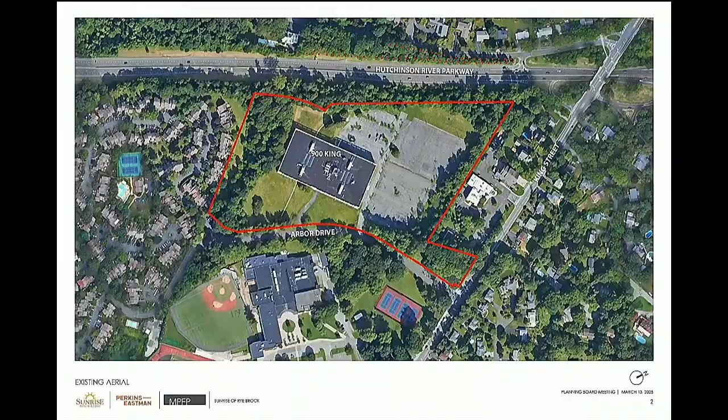So this is the site plan as was approved in September of 2021, and this is our proposed site plan. As you can see, substantially the same and consistent with the prior approvals in terms of coverage and setbacks and the like. It's very hard to differentiate the changes, I guess, so we have layers - we superimposed one outline on the other so you'll be able to see it.

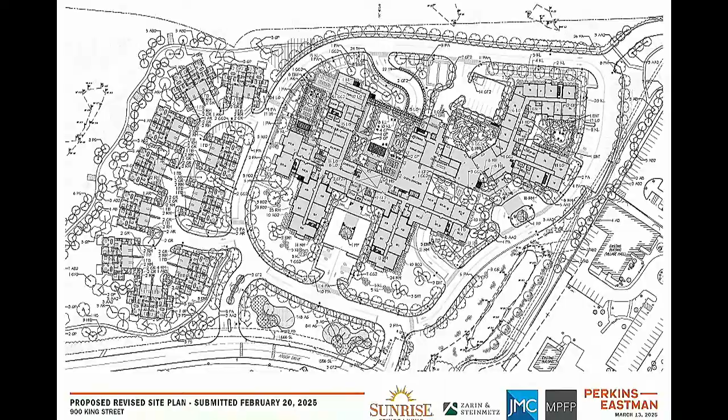But just as a refresh, the number of units, both within the independent living, the assisted living, and memory care, have not changed. And the parking, there's a slight increase in parking because of the two-car garages, but otherwise the parking is consistent with what it was.

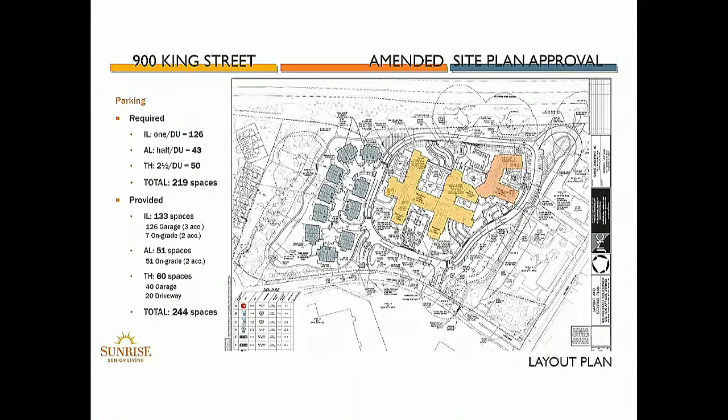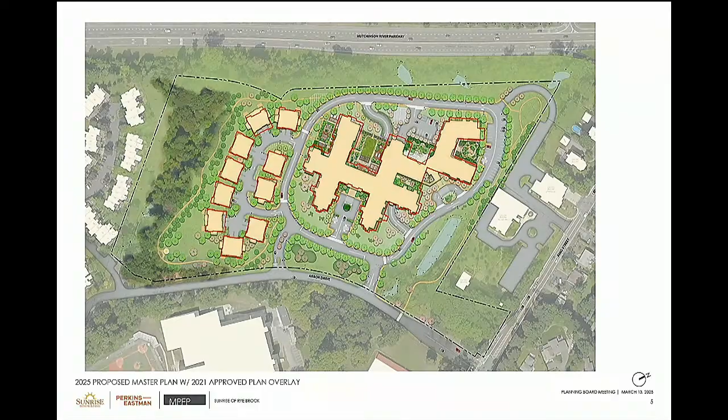I'm going to quickly walk through this, and then I think Rick's going to take over from a landscaping and site development standpoint. This is the master plan landscaping plan rendered to show you - this is the September 2021 plan as approved, and this is the new current plan. Hopefully you can see the red line, which is the outline of the previously approved, superimposed on the new plan.

So this is Rick Parisi, MPFP Landscape Architects. Nice to see you guys, been a long time.

So what Stuart mentioned is what you see here in this plan. The red line is the old building over the new building. What we gain, when David talked about the increase in our open space, that's in those courtyards there. We took a piece of building out and created a couple of new courtyards. The rest of the site plan remains the same. We moved trees around to accommodate some changes in the building.

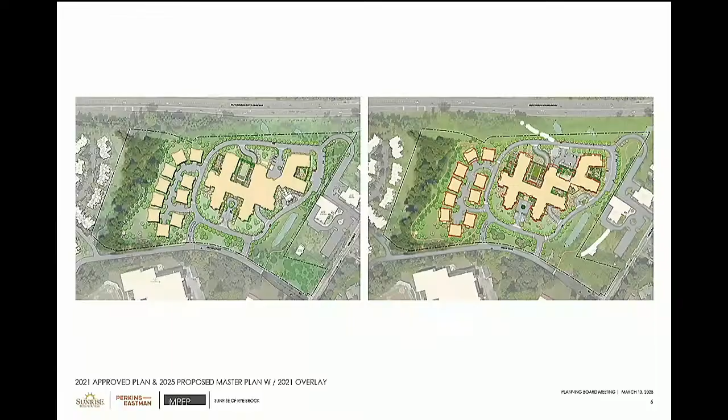There's a memo that notes we were shy on shrubs by 100. We were not intending to be. We're going to have the same amount of shrubs we had before. We didn't really total them up, but you guys did. Our intention is that the planting remains the same, the screening remains the same, the open space increases. They said there was an increase in trees but a decrease in shrubbery. Yes, but there's no decrease in shrubbery intended. In fact, we'll probably have a little bit more. This is an enormous site, and the numbers are very big, but perhaps when we were drafting there was a drafting error, because the number was supposed to be the same. We did put more trees in. I'm sure Sarah caught it and will make sure everyone is in accord on the number of shrubs and trees.

The important thing is that there's a 13,713 square foot increase in the open space. We went to the ARB with that and have an increase in that - that's those courtyards and some of the other areas around there. Everything else remains the same.

What you can see here are the aerials we created in 2019-20. They show the existing vegetation that is retained. We're not taking any vegetation down adjacent to the arbors. That light green area is additional vegetational buffer, which we worked on together with you and the arborists many times, going round and round and adding like 30 feet of additional vegetation along that whole area.

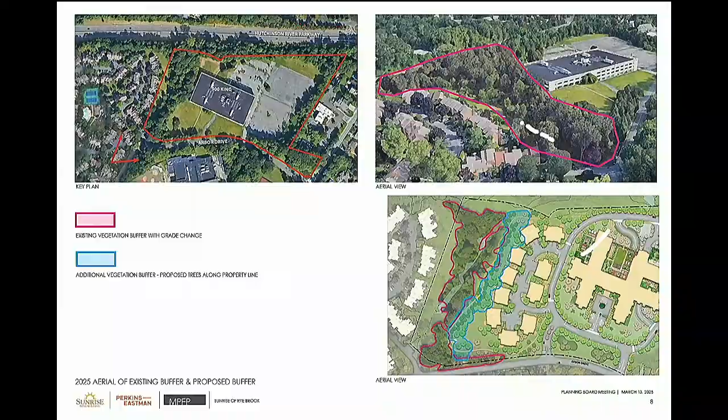Can I interrupt on that? We had another community with a similar initial worry about screening. Screening was added and brought up close to the buildings, and now 10 years later they're getting a lot of dieback, and both parties are sort of regretting what happened, because of the density. I'll let an arborist describe it, but we just went through this with another community here in Rye Brook about two months ago, and both parties are regretting densifying the screening.

You can't plant it like we used to plant parking lots with evergreens. This is planted in a very natural setting - there's a lot of room between the evergreens, and then there's a layer of deciduous trees behind that. We went through this, we gave it a lot of room because we wanted it to be sustainable, so that issue won't crop up. The problem is trees tend to grow, but that's a good thing.

So the next one - that remains the same, it's exactly the same as it was. That's what these two plans show. No change in the buffer.

Next, these are the pictures - I forget who walked this with me, but Steve Ketchumont walked this with me at the Arbors. We walked this many times and took the photographs because everybody wanted to see the winter views. On the left is the winter view, and on the right is the proposed condition with the new building. Remember, we're putting over 30, 40 feet worth of layers of trees beyond that, and some of those are evergreen. We showed you this in 2021 - so again, another view.

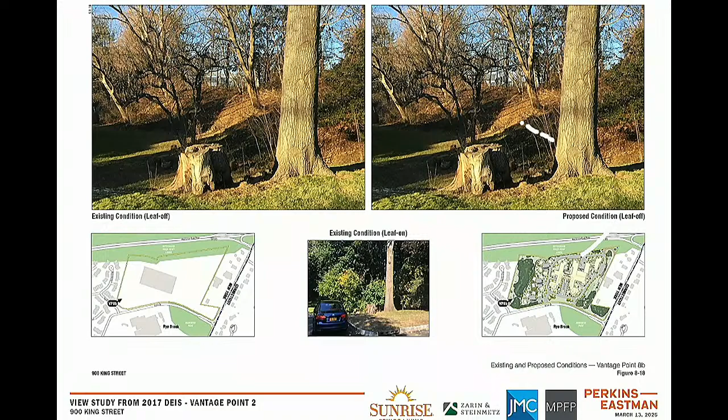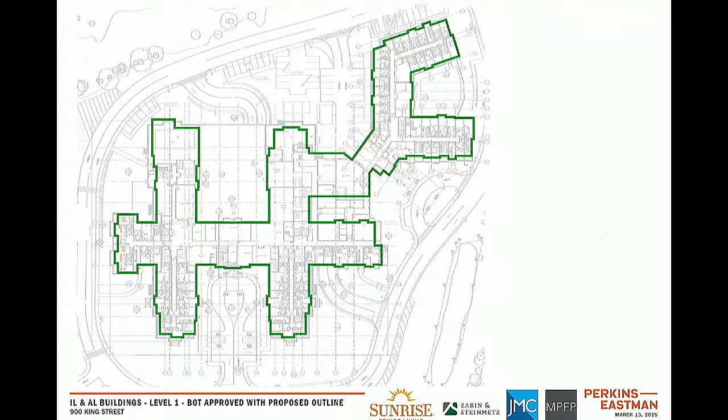And this is the new proposed plan. Just to give you numbers to work with, a little over 48,000 square feet in total building area have been reduced from the IL and AL buildings, and the footprint itself is reduced by over 10,000 square feet between the two buildings.

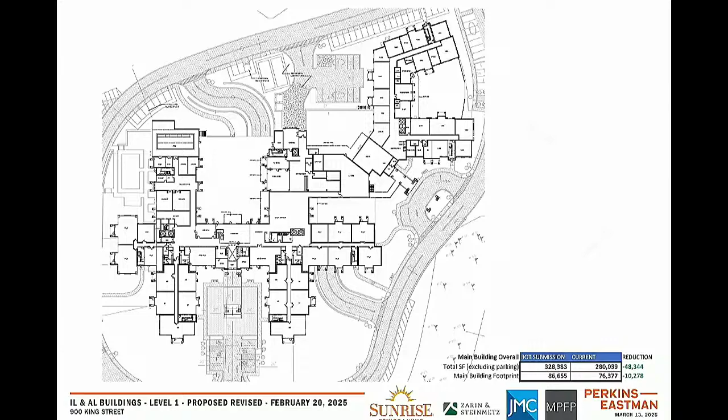I'm not going to go through these in detail, but we've got some slides that will highlight it. These are the sort of changes around both the site and the building that really articulate the difference that we've done. I think Anthony's going to walk through these one by one.

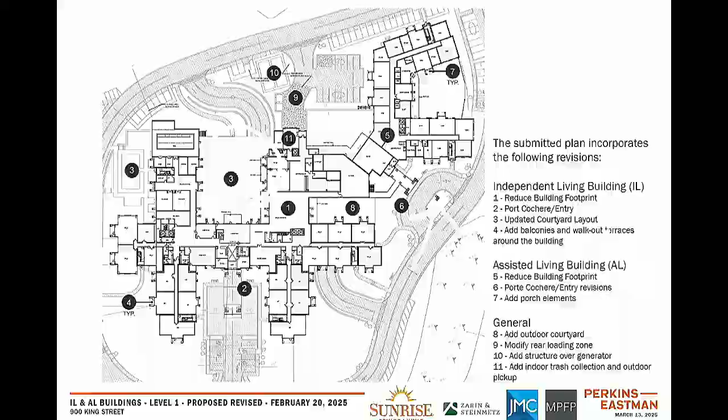So as you come in up through into that space, we increased the access width around there to 24 feet to give us some more room, just in case you want a little bit more flexibility and some more space as cars are parked along the curb. And just keeping in theme with the revised architecture, squaring those things off just seemed to open everything up and make it a little bit more open feel instead of having more of a cramped feel.

The remainder of the on-grade parking spaces: the previous plan proposed 7 parking spaces located in this area. We're still locating 7 on-grade parking spaces in that area. The location of where this access came off the main ring road has not changed. It was really just the circulation around the drop-off area which was changed.

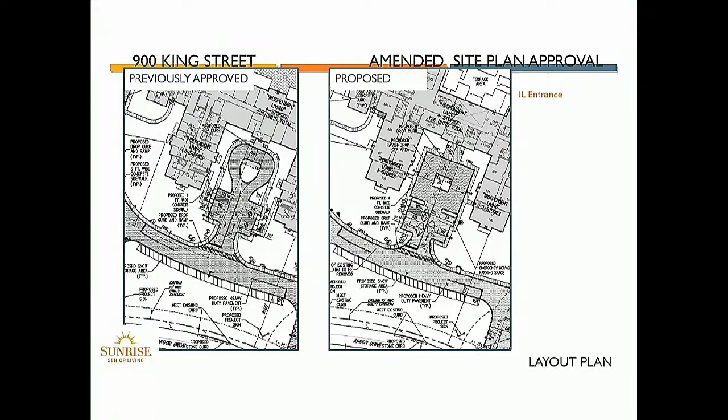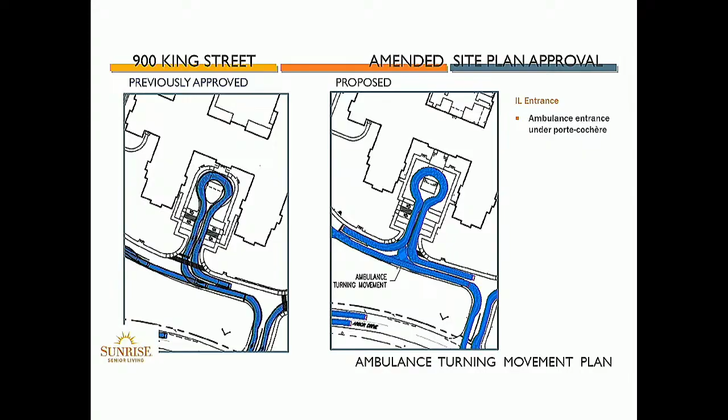Let's go to the next. What I do want to mention here too is the porte-cochere. There's the existing porte-cochere and the new porte-cochere here. It still maintains a clearance height of 14 feet, which is important for ambulance access around. So as you can see here, we provided the turning movement plan for an ambulance to make sure that they can adequately maneuver around the drop-off area and under the porte-cochere.

This is the AL entryway. Previously, on the left, this is the previous approved plan. It's still what they used to call the eyebrow drop-off area with the arch. The location of the actual turnaround has not changed from plan to plan, but the width increased 6 feet, from 18 to 24 feet, just to provide a bit more space for the drop-off.

Have emergency services seen the new proposal? We met with what's called the Safe Housing Task Force, or Emergency Services Task Force, and had a meeting. They had some comments, but didn't seem to have issues with these changes to the entryways. We reviewed everything and provided it to them, so we're waiting for their comments, which we'll address, and will probably have another meeting with them to cover all their concerns.

And I assume that includes fire, police, and EMTs? Yep. One of the comments from EMS about this entryway was to have an area for the ambulance to park, hence why you now see 24 feet there. That makes sense, so you're able to have an ambulance stationed while cars go by.

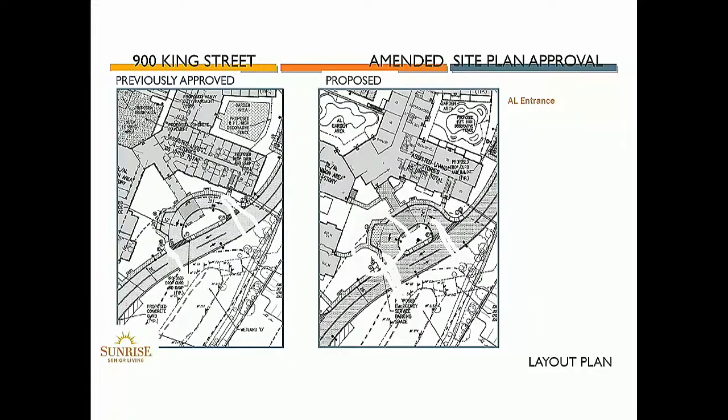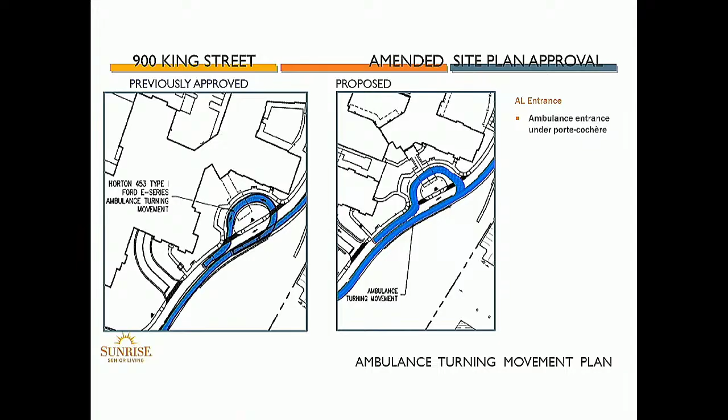In addition, there's an emergency service vehicle parking area, which was requested at the previous approval, and those still remain at each entrance, located there. With the porte-cochere, the height clearance is 14 feet. This shows the movements of an ambulance, able to maneuver around there without any conflicts.

The next area with minor modifications was the back of the house, or back of the building. This change was brought more to provide more open space, as Mr. Parisi mentioned before, and program space for the facility.

On the previously approved plan, this area here versus this area on the current proposed plan — you can see there's now a large AL garden area, which is a program space for some of the residents of the assisted living portions of the building. To accommodate that change...

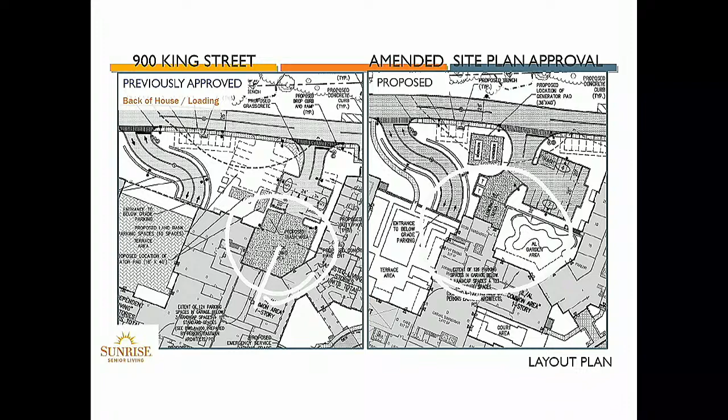Going to the next slide — the loading area, the hard concrete loading area, which was oversized to begin with for what was being done there, you can see it a little better here. It was modified to just provide an apron for when trucks come in and drop off. Everything is loaded off the truck, so there's no recessed loading areas or anything like that.

It was revised slightly to accommodate this new gardening area, and also to provide a bit more open space and green. We also wanted to move the generators, which were located closer to the building, as you can see on the left in green — they were relocated further west, towards the hutch, for noise and to keep them further from the building. Same with the trash, which was relocated up into the corner of a parking area over here.

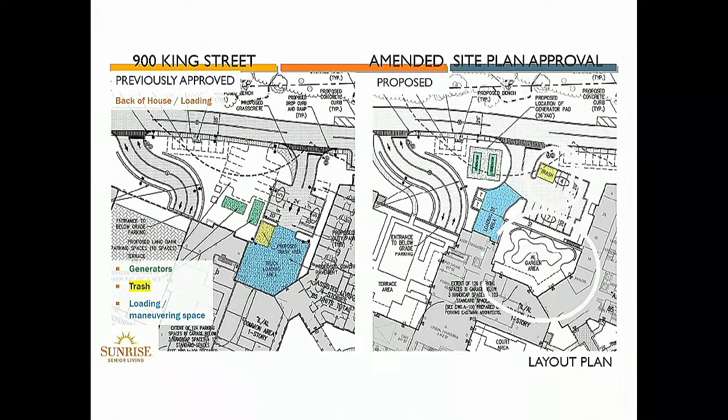It provides the same amount of parking spaces, and the maneuvering of trucks and access in and out remains the same.

This is the townhouse area of the project. You can see on the left versus the right, which is the current approval, the access road to these cottages or townhomes, whatever you want to call them, has not changed. The reverse-D access road that these are served off of hasn't changed — the location is the same. If you lined them up, they were in the exact same location.

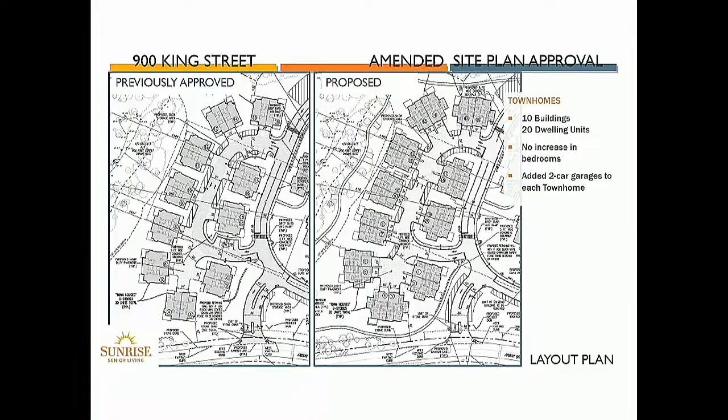They were slightly adjusted between the property lines in the rear along the hutch, as well as the property line along Arbor Drive at the bottom, to maintain required setbacks — front yard 42 feet off Arbor Drive, and rear property line 30 feet.

With the two-car garages, the parking provided for these exceeded 2.5 spaces per dwelling unit. Every unit has a two-car garage and a two-car driveway, so that's 4 parking spaces that could be allocated per unit. In our proposal, we only allocated 3 spaces per unit — whether all 4 spaces are used or not, there's still more parking than required by code.

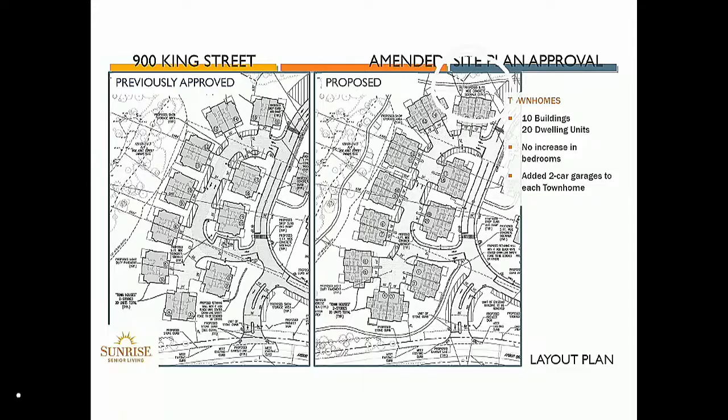Unless there's any questions... Can you address the decrease inside, in square footage? In the whole building, not just the cottages, the entire building - you're making everything smaller, even though the footprint is the same.

I want to know if that includes the main areas in the larger buildings. The larger buildings - the whole building has shrunk slightly. The overall plans are a little more efficient. We took a little depth out of the apartments as well, so it's a lot of very thin slices all around the building as opposed to making large changes to a few areas. Does that answer your question?

Is your dining space the same? Do you have different dining rooms? Programmatically, it's the same. There's been some minor adjustment to facilitate the way Sunrise likes to operate their dining facilities, but I've seen a few of their facilities, and this is going to follow that pattern, replicate that model. Yes, okay.

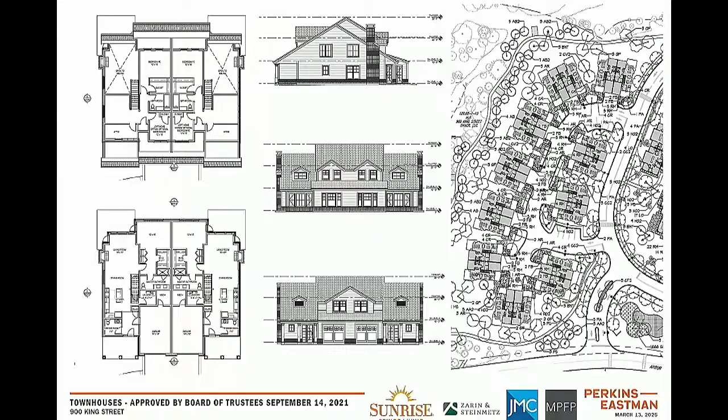This is the townhouse plan from the September 2021 approvals. At the time, we only had one townhouse configuration that was mirrored and repeated for all of them. It had a primary bedroom on the ground floor, potential for 2 bedrooms upstairs, and a single-car garage.

We have now incorporated 2-car garages. We've reconfigured the space on the ground level, so there is no substantial change in the square footage of the townhouses. Now we have a variation that moves the second bedroom from the upper level to the ground floor, still with the 2-car garages. We got the question earlier about what happened inside as a result of adding that bay - it's really moving space around.

It's not like we took square footage out of the townhouse to accommodate the garage space - it's more of a reconfiguration. What I don't have for you, and can have next time or in a memo, is the exact square footage differences. I would like to know that. I kind of thought you might. So the footprint on the ground floor - you introduced another garage and another bedroom - that footprint had to increase, or something else shrunk in size.

It is a little larger, okay, for those 20 townhouses. And because they're doubled up, it's really ten blocks where that occurs.

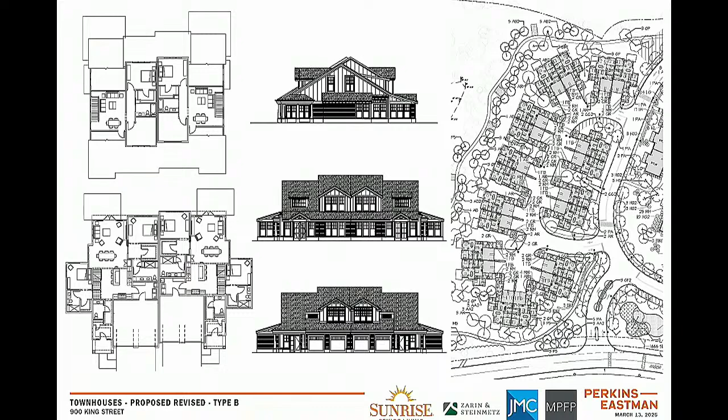And really, this is the end of it, which goes back to what Mr. Steinmetz talked about at the very beginning. The elevations - we have adapted them based on the changes to the basic building floor plan. We're still tweaking these; they'll get further refined, with larger presentations and renderings for the ARB. But I want to make very certain - you can see in the bottom, that's the front elevation view from September '21, outlined in red to show the various heights, and then moved that line up so you can see the differences.

I'm going to pick a different color if I can. Maybe not, but you can see there are some areas where the roof line has actually gotten smaller, or the footprint has gotten smaller, but the main point is that the maximum height of the building at its highest point has not changed. This had been an evolution as part of the design back in 2021 when we were talking to the ARB. The 6 false dormers that were on the roof in September '21, mentioned in Mr. Noskin's letter, had already been removed and remain removed from the plan.

And that's really it. Mr. Lax, can you point out - I read someplace that there are some balconies. Is that in assisted living or independent living? Both. Can you point them out please? Here's balconies - these balconies were there, you can see we just changed the configuration. Okay.

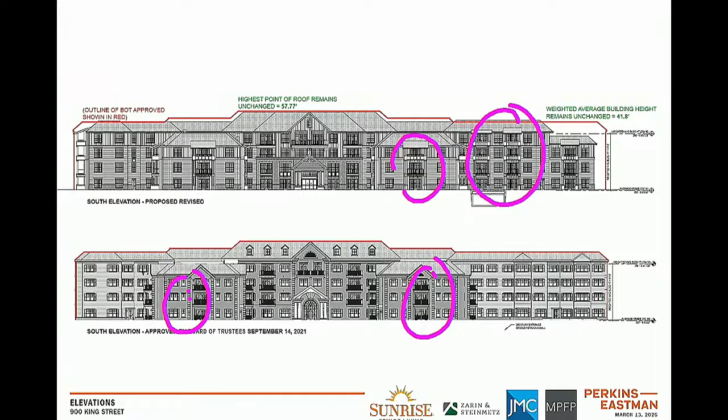Yes, you can actually go out and put a chair there. In Sunrise's experience, residents, even though they have plenty of open space and lovely amenities, people like to be able to open a door and sit outside.

And that's gonna go by the architectural review board on this? Correct, yeah, that will be, we will present that in detail.

Okay, thank you. Are the windows to me, and I said this back in '21 also, have a feeling of bars instead of openness. And it's disturbing to me. It reminds me, please don't take this in an unintended way, it's just an observation. There used to be tuberculosis facilities upstate in New York, and that is the way the windows looked. And I think, to me, this is off-putting.

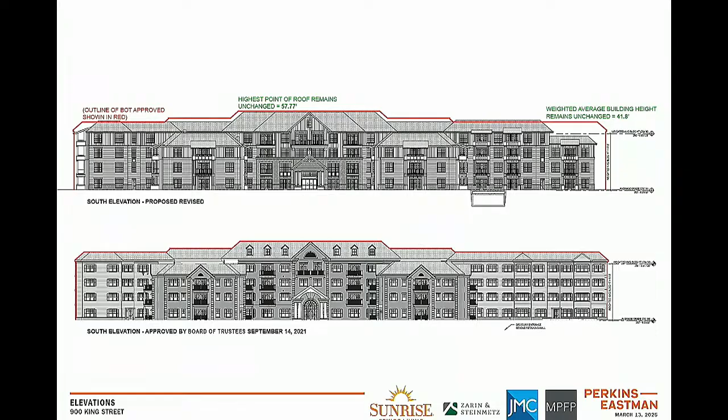They just seem to be like bars on the windows. I understand and appreciate your comments. I would ask you to hold until we present better views, the sort of black and white drawing presentation does not... I did consider that. I think you can see some of that in the rendering.

So what we were hoping to do tonight is simply give you an overview of these changes. Based upon your questions, I want to make sure that Stuart and I put in writing specifically some of the measurement and square footage questions you prompted, so you get very precise answers on the overall reduction of the massing of the building, the overall reduction or changes in the unit sizes, increases where appropriate, as well as the parking numbers. So we'll provide all of that in a written submission for the next meeting.

Could I address Anthony? Please. I may not let him answer, but go ahead. Yeah, Anthony, Don Crum. I want to go to the Dolph engineering letter, which you probably haven't had a huge amount of time to look at. I looked at it quickly.

Okay, but what I want to say is that this letter sort of shocked me. Enough time has gone by. I wasn't on the planning board four years ago. In fact, this may be my last meeting, depending on the election. I may be moving to the Board of Trustees, depending on the election results next week. But what I want to say is there are very, very fundamental issues that are raised here. It doesn't seem to be minor issues.

They're talking about the sanitary sewer not being proved adequate. Now, and I'm going to let you address that. Perhaps the water system has not been built out adequately. Maybe it has, maybe it hasn't. And then the stormwater - it's saying the stormwater plan, which I spent a lot of time over the weekend looking at the details, great plan, does not increase stormwater runoff from the site versus existing. But it's saying that the assumptions the whole plan is built around may be flawed.

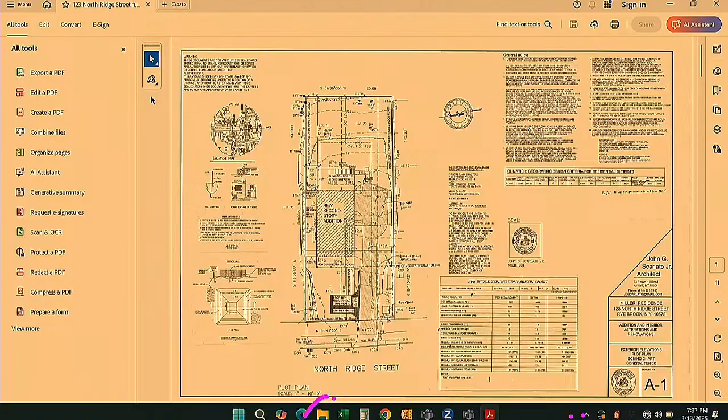So if we look at the site plan, because we're in the scenic overlay district, the front yard setback is 45 feet instead of 30. So it cuts through the house, and we need a front yard setback for the house for the second floor.

We also wanted to add a front porch to the house because we're kind of across from Crawford Street. We're trying to, it's gonna be a two-story house from a one, so we wanted to scale it down. We thought a porch would be a good idea. So now the porch pushes out the front of the house by the 6 feet that we're putting for the porch. So we need a front yard variance for the porch and the second floor.

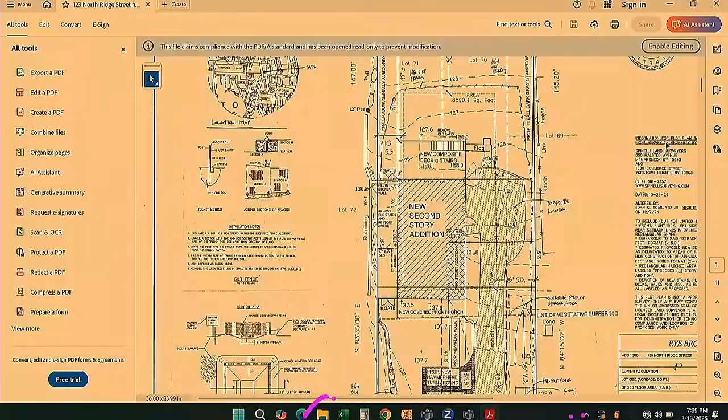The existing house sits too close to the left side - it's supposed to be 10 feet off and the house is like 7.5. So we need a variance for this, for the second floor, for the front porch to align with the front of the house, and since it's kind of a thin house, for the deck to align with the side of the house.

We also need a height ratio variance on the side that's too tight, because we're going to the second floor.

And because it's North Ridge Street, we're trying not to back out onto the road. So we wanted to put some kind of turnaround in the front yard, which is considered parking in the front yard. I know the review letter noted that because this garage enters from the side of the house, the lower part of the driveway is fanned out, but they don't really use the garage. If they use the garage, you can't park there because the car blocks the turn to get in and out. We could maybe play with something at the bottom, but I think it's gonna be more pavement because you have to be able to get in and out of the garage and then still back out and turn.

I know the comment was that if you did more down the hill, you could turn around at the bottom of the house and then pull out the driveway. But a lot of people, either there's gonna be cars down there or a lot of people aren't gonna pull all the way down to turn around, if people visit. So that's kind of why we wanted to try to do some kind of turnaround in the front yard.

And we did do a planting plan to add a buffer of landscaping along the front of the house between the road and the parking area, which we can look at.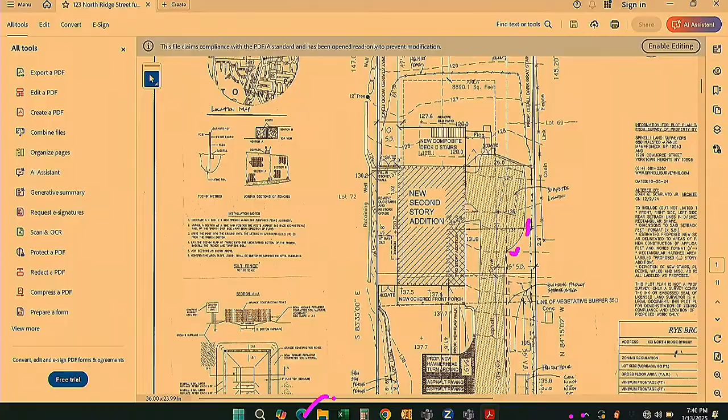I guess my overall impression was that you have a decent number of variances to deal with. Have you given some thought to any ways of maybe limiting those? I think I have the record of the most variances, which I'm not supposed to ever top. But is there any ideas you have - one is dealing with the driveway and that turnaround, whether there's another way of doing that. But also you're adding a second floor to a house that already looks sort of tall on a scenic overlay district, and it just seems like there's a lot going on with the house, with a very limited footprint that you have, and a lot of challenges to deal with.

It's challenging because it's a thin lot and we're on the house. I mean, the front of the house isn't as tall as the back of the house because the back walks out. So it's a good thing that the back is taller than the front. And the deck on the back of the house will help soften the rear part of it.

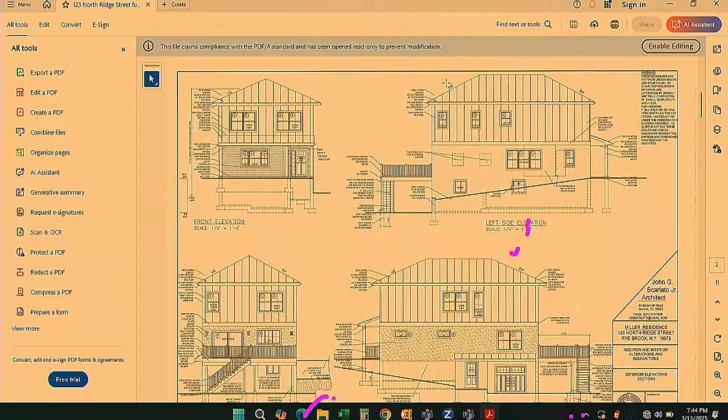But what I'm thinking, John, is that the first thing we would do is we would set a public hearing. And I'm not sure, it's up to you how you want to do this, but it seems to me that maybe we can put our heads together and come up with some compromises on what can be done in order to limit the variances or eliminate them. Because I think your usual method, like with some other projects, is to go to a sketch plan conference and sort of lay it out, see if this can work or not.

I'm not sure that taking everything, all the things that need to be done to this house, that there are a lot of issues, if it gets before the ZBA without any compromise, I don't know what they're gonna do with it. Because the problem is not with the architecture, the problem is with the lot. It may be that the expectations are just too much for what can be done with this. So I don't know.

I have not looked at the site survey map. Right.

I don't know what's the terrain in the back of the house, but one of the things I would suggest is turning the carport on the front—it's going to become a parking lot, you and I know. Could that turnaround be done on the back of the house and eliminate that component? I think we could probably work where the garage is and take more to the side, and provide for the turnaround on the side of the house so it's not visible.